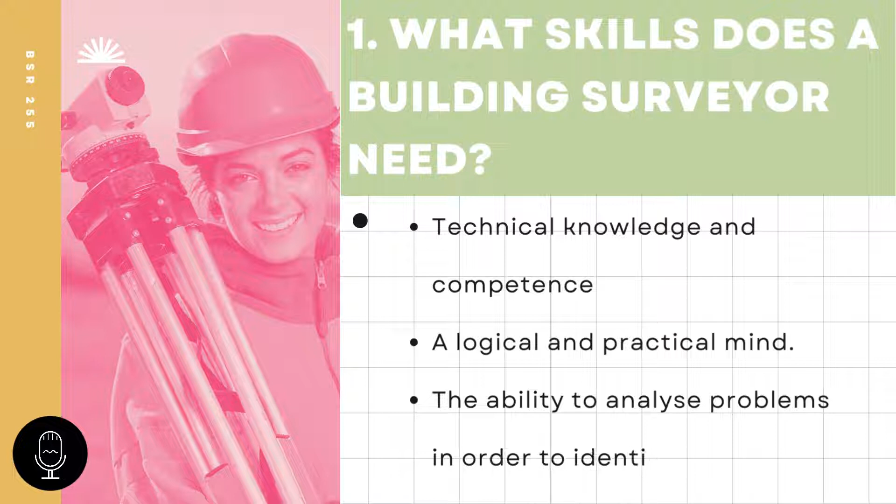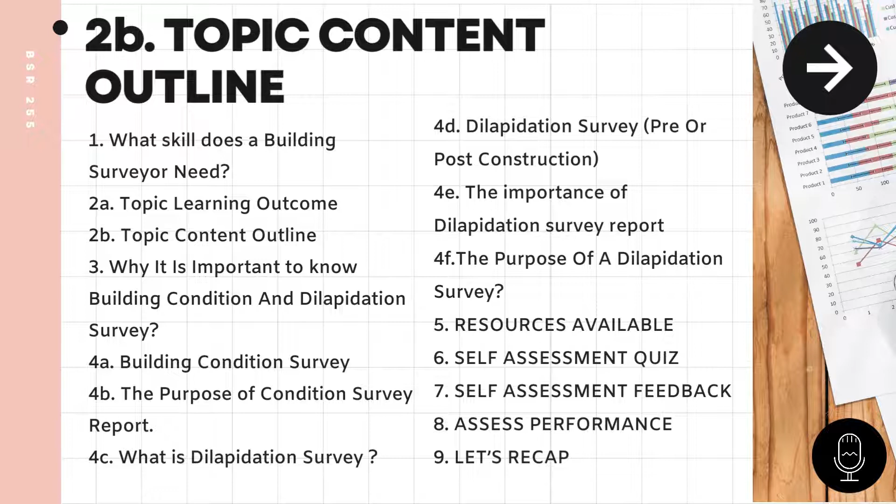Here is the topic content outline. Number 1 is what skill does a building surveyor need? Topic learning outcomes. Topic content outline, why it is important to know building condition and dilapidation survey, building condition survey, the purpose of condition survey report, what is dilapidation survey pre or post construction, the importance of dilapidation survey report, the purpose of a dilapidation survey, resources available, self-assessment feedback, assess performance, and let's recap.

Why is it important to know building condition and dilapidation survey? The first is to know the current conditions and any existing structural damage of the building. Number 2 is to provide evidence to counter fraudulent claims, liabilities, and actions.

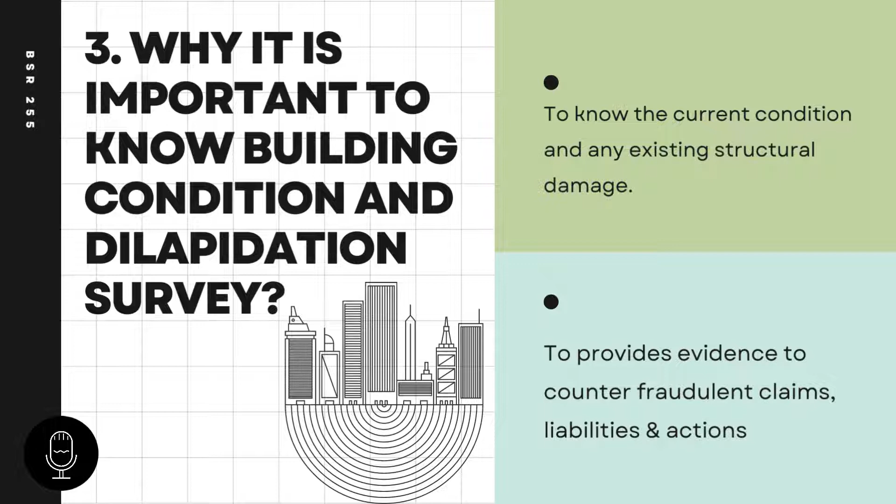Okay, we start with the building condition survey. What is a building condition survey? The inspection to be carried out of the building, a visual or non-destructive test, or we call it NDT, of a building, including but not limited to the architecture, C&S and M&E elements. Then we can use the building rating to identify the condition of the building. Then we need to recommend the repair works to the clients, and then we need to do the cost estimation for the repair works.

Why do we need a building condition survey? It is to get the overall condition of the building, the sources of defects, and the priority of the repair works. And then we need to plan maintenance work, program, and budget allocations. When is it required? Any time required for the building condition survey.

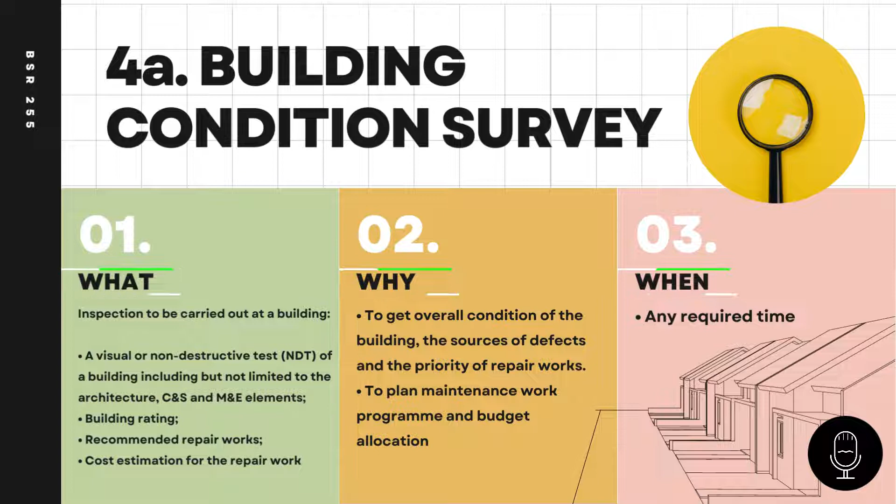The purpose of condition survey report. What is the purpose of condition survey report? To give an independent professional opinion on the condition of the property. The professional opinions are on the structure of the building, such as foundations, the columns, the beams, floor, walls, roof, and etc. Comment on siting, environment, and planning of the property. Report on finishes, services, and some major fixtures and fittings.

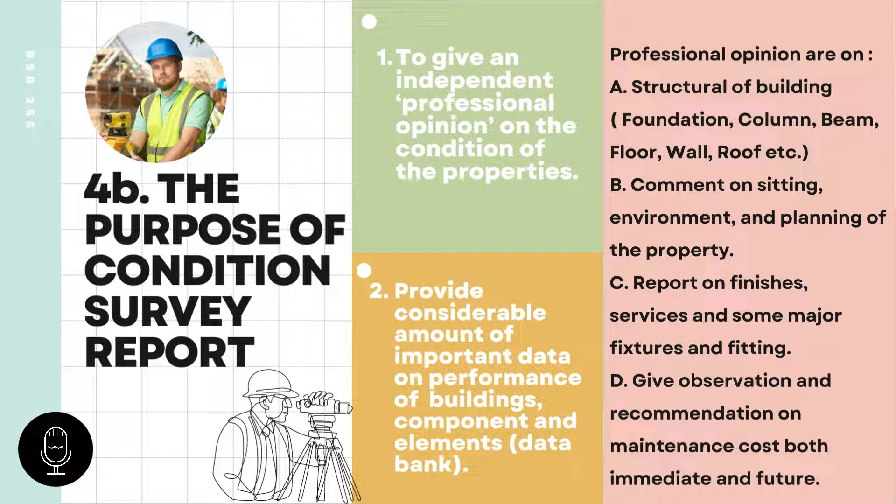Give observations and recommendations on maintenance costs, both immediate and future. Then, in the report, we need to provide a considerable amount of important data on performance of the building, components, and elements, such as a data bank.

What is dilapidation survey? A dilapidation survey is performed by a building surveyor on behalf of the landlord or property manager to assess the condition of the property. Dilapidation work will need to be carried out on the building in order to bring it to its original condition. The main purpose of a dilapidation survey report with photographs is to record the original and existing conditions of the property around a construction site. If there is any dispute on building damage in the later stage of a construction project, the report with photographs will be strong evidence to solve the disputes.

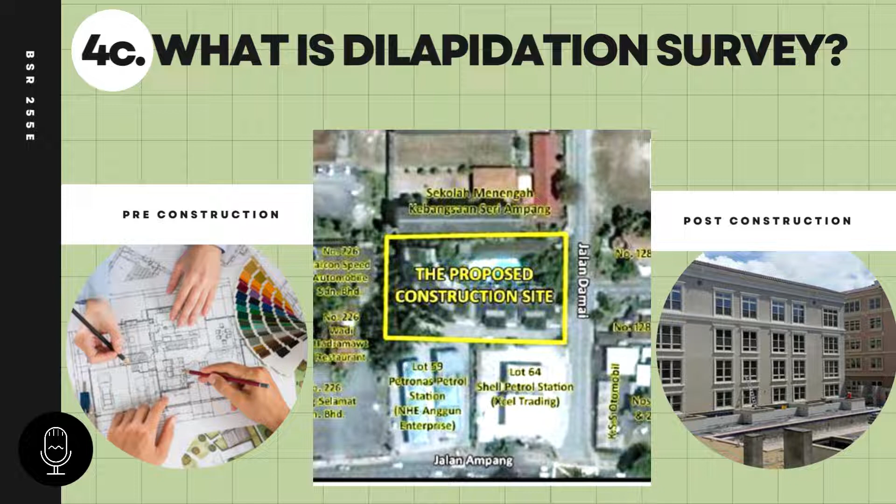Okay, dilapidation survey, or we call it a pre or post-construction survey. Inspection to be carried out at a building, a visual or non-destructive test or NDT of a building to record the existing conditions of the building and structures surrounding the site area. At least 30 meters for normal construction work with a minimum vibration damage guide based on BS 5228-1 1997, or 150 meters for blasting works, CVDG construction vibration damage guide BS 5228-1 1997, or 200 meters for heritage buildings, National Heritage Act 2005, Section 40.

If any building is under JMB or JMC, the coverage for inspection is on common areas only. This is for the Strata Management Act 2013, Act 757. Why do we need a dilapidation survey? To record in detail the pre or post-construction existing conditions of the buildings and structures within the anticipated zone of influence due to the construction activities, in order to form a basis of reference against future assessments of damage and claims from third parties.

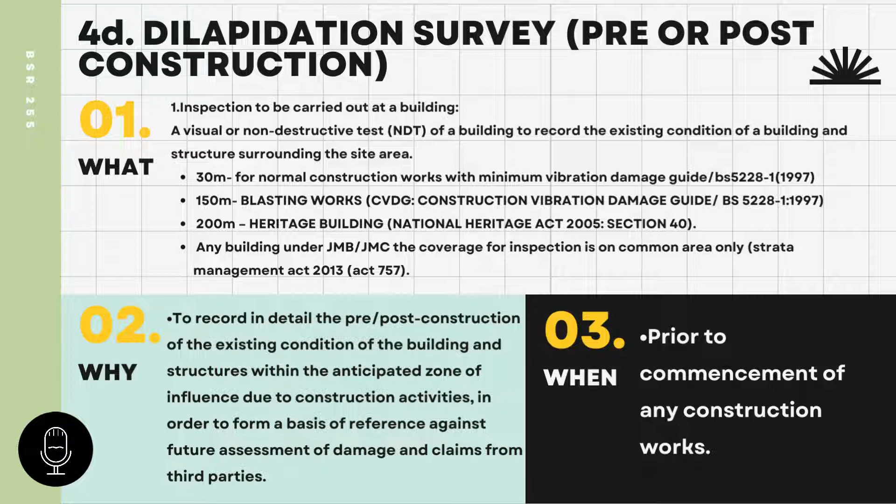When can we do the dilapidation survey? Prior to commencement of any construction works. Importance of dilapidation survey. Dilapidation survey is also known as a pre-construction condition survey in Malaysia, as I mentioned before, or sometimes called structural survey. Dilapidation survey is a very important survey before the commencement of any construction or demolition works, prior to excavation and piling works of a development or construction.

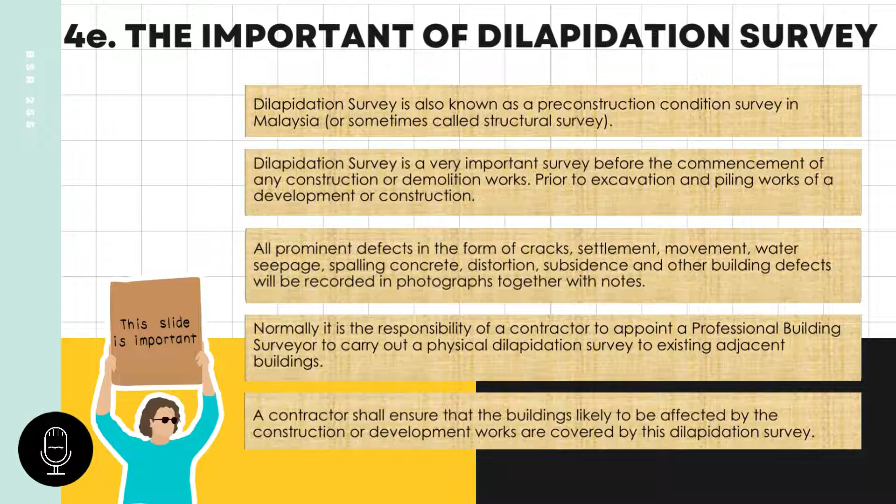All prominent defects in the form of cracks, settlement, movement, water seepage, spalling concrete, distortion, subsidence and other building defects will be recorded in photographs together with notes. Normally, it is the responsibility of the contractor to appoint a professional building surveyor to carry out a physical dilapidation survey of existing adjacent buildings. A contractor shall ensure that the buildings likely to be affected by the construction or development works are covered by this dilapidation survey.

Next, the purpose of dilapidation survey report. What is the purpose of dilapidation survey report? The purpose of dilapidation surveys or pre-construction condition surveys is to provide an accurate record, pre-construction works, of the condition of the buildings. While it is not expected that neighboring construction will cause damage to any building, the survey is undertaken as a precautionary measure. The survey report done by a professional building surveyor will assist the building owners, contractors, and developers in the event of a claim for damage, as the dilapidation survey report provides written documentation on the pre-construction condition of the property.

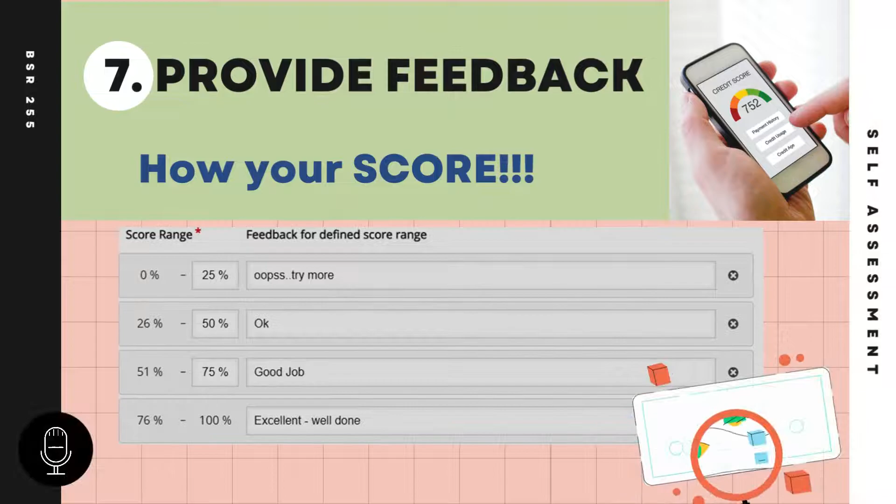Self-assessment quiz. Did you understand the explanation just now? Let's check. Please try the self-assessment quiz provided here. How was your score? Next is the assess performance. Please click the link below to answer the quiz.

Well done, you already finished learning this topic. Let's recap this topic. You learned about the building condition and dilapidation survey. That's all.